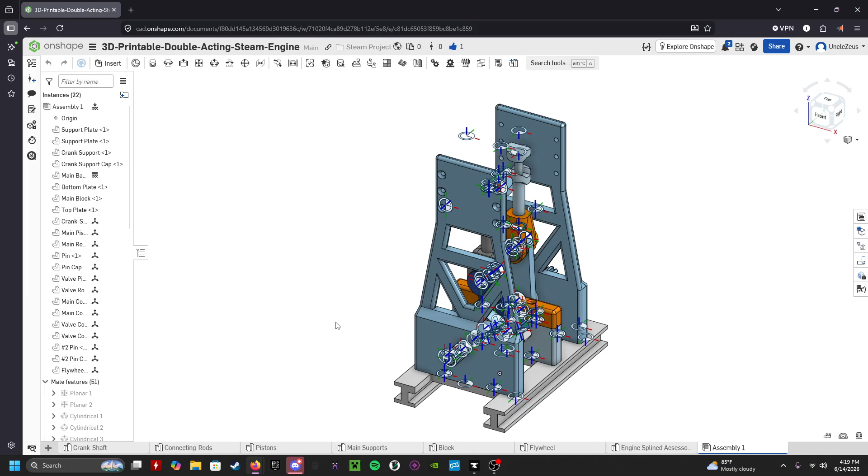It's a bit of a mess here, but this is what it looks like on the inside anyway. For some reason, every time I try and hide all of these mates, these connectors just show up. I have not figured out how to get rid of them yet, and it's really annoying, but we'll deal. But this is the engine.

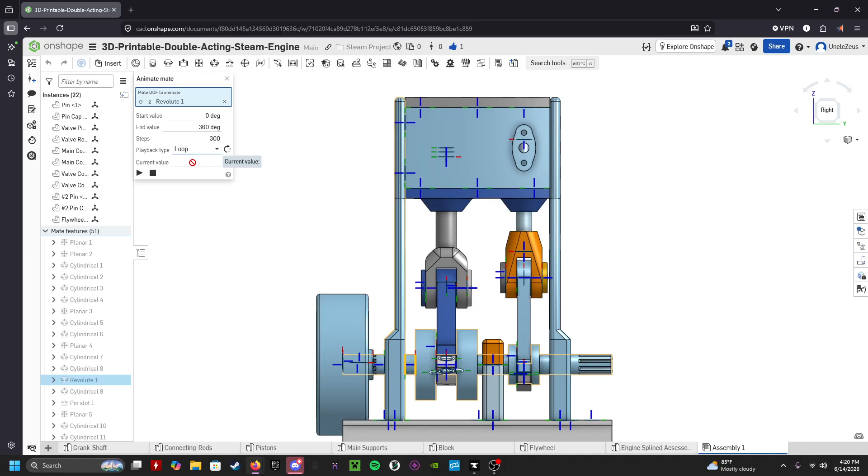Let me go find my Revolute joint here. Animate. Set this to loop. Okay. Set this to transparent so we can see what's inside. So this engine is operating backwards at the moment. Oh, no, it's not. It's spinning counterclockwise. That's right. So it is spinning the right way.

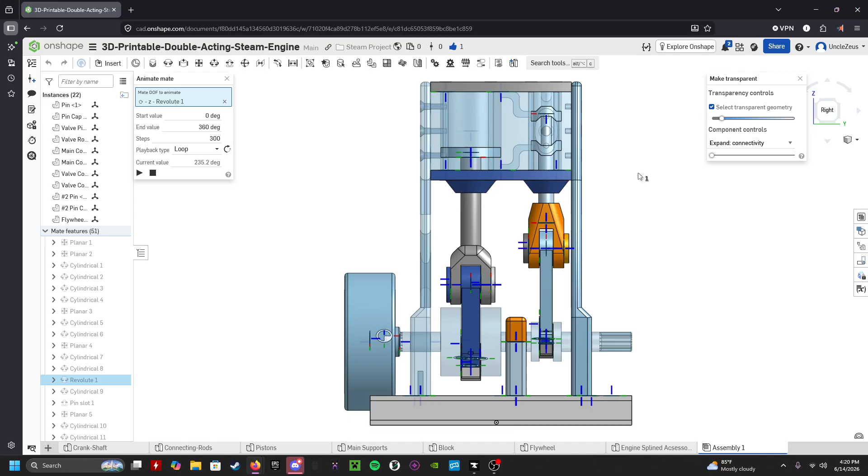So as you can see here, as this slider moves, pressure comes in from the middle, pushes the top down, exhaust, pushes from the bottom, and it just repeats. This side is the intake. As you can see here, it feeds into this small tube that goes inside the valve body. The exhaust is a little bit more complicated. It feeds from the top and the bottom into this tube on the output.

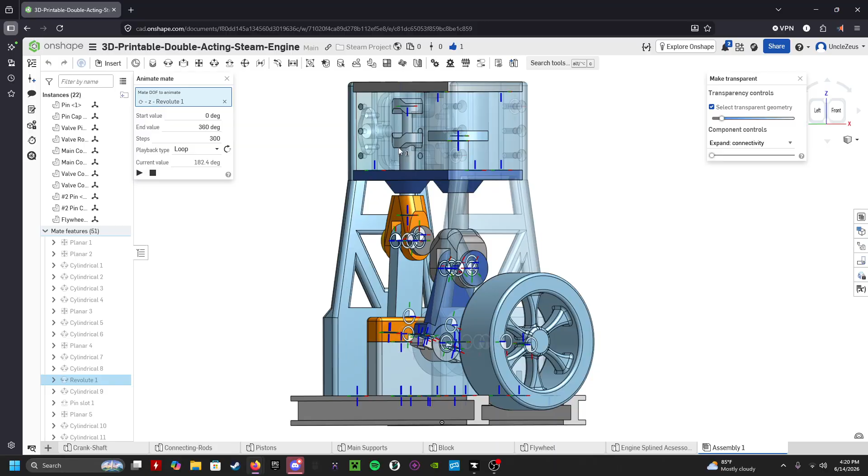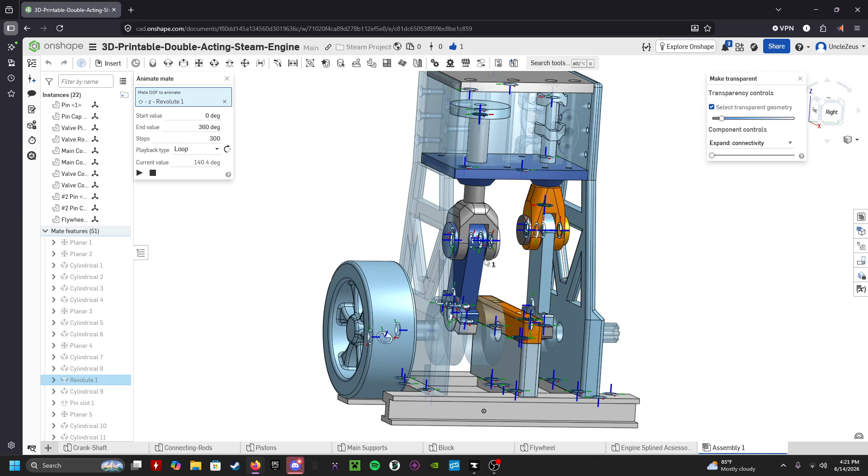And then, as you can see, there are these transfer ports that go to the top and bottom of the main piston. I guess this is the advantage of using a 3D printed part, is I can make these internal channels pretty easily without too many problems. I don't remember the exact length of all the parts off the top of my head anyway. I can go look at my spreadsheet, but that's whatever.

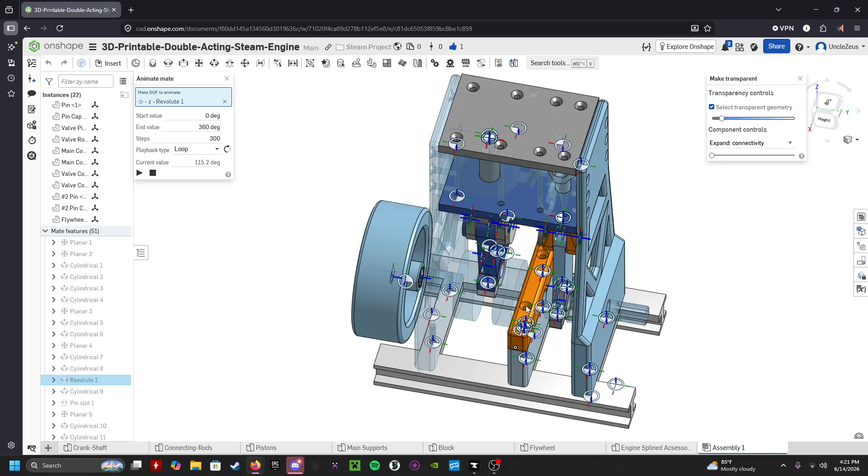You may notice that in the testing, this cap here was not put on. It's because when I was designing this, I didn't really think to consider how it was put together too much. And these screws just simply don't fit. I can't get the Allen key to get to them, not easily anyway. And it was causing too much friction anyway with the crank because it wasn't worn down properly and it was a mess. So on the real one, it just isn't there, but it was supposed to be there to help keep the crank in place.

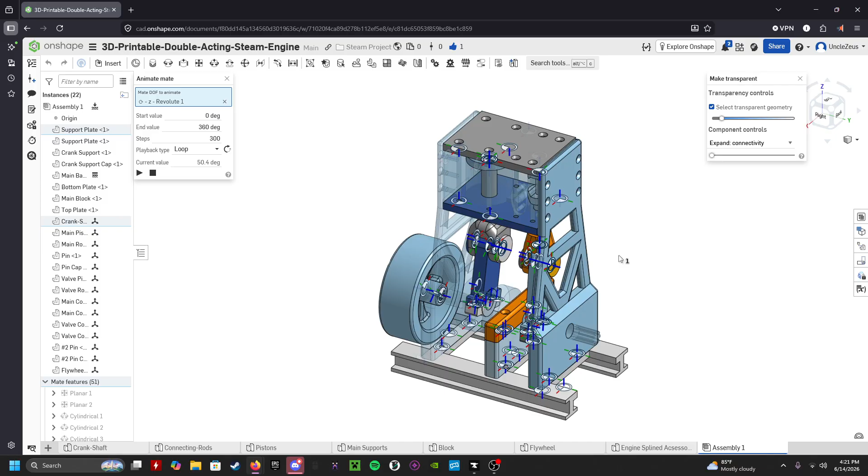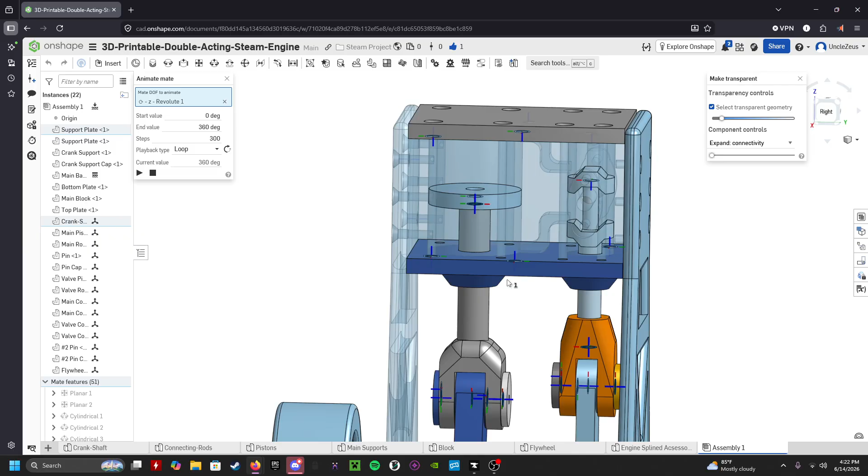As for other designs, we have this top and bottom plate for the main block here. The bottom plate has these two cone shaped pieces here and will help keep better sealing against the surfaces here. I wanted them to be separate so that they can bolt on with O-rings on the inside, but I just didn't get around to doing that. I plan on making a Mark II of this pretty soon in order to improve a lot of things, because as you may notice, there's no O-rings, gaskets, or seals. It's just running as it is.

And there's a lot of friction due to the parts because I made them pretty tight tolerance, and 3D printers aren't known for their, you know, manufacturing detail. So one of these days, I either want to get an SLA printer or just redesign this and make the parts have better clearances and just use bushings, which would probably be the best for everything.

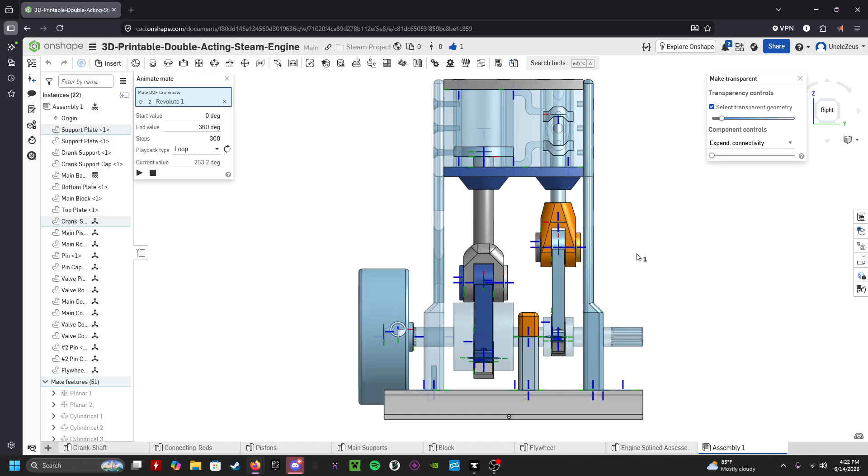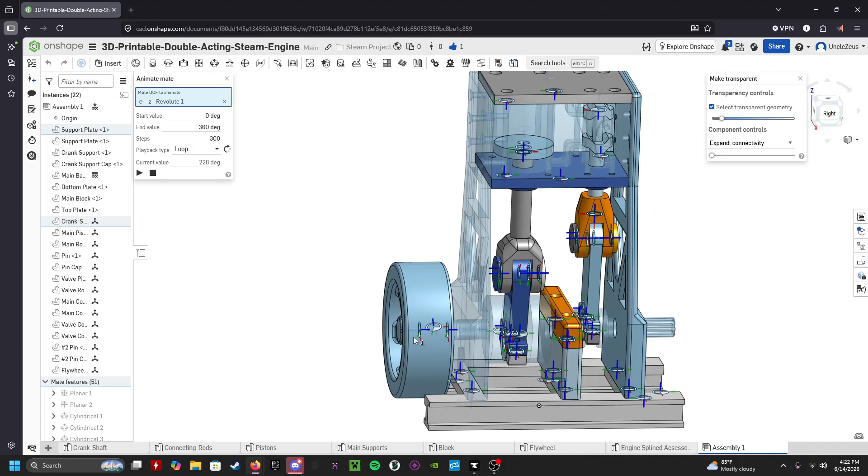It has a, I believe this is a 12 point, no, this is an 8 point spline on the output, which is connected to the flywheel right here. I actually printed two of these. The first one I made the splines a little too small and it was really hard to fit on, but the second one fits better. It is a little warped though, if you notice in the engine running video, it wobbles a little bit. None of this is balanced. It's kind of just chucked together. It's kind of a miracle it runs.

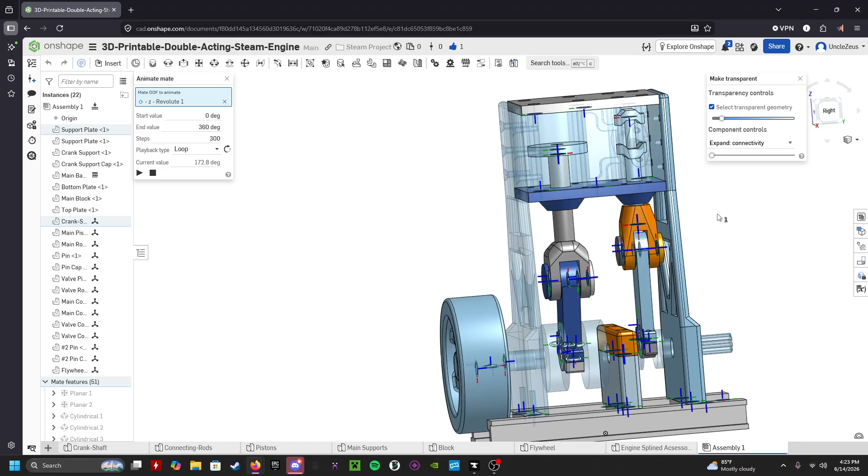Each one of these frames is bolted from the bottom using 6 M3 screws that are countersunk. All of the screws in this build are M3 by something countersunk, except for these two bolts here, which were meant to be socket cap, but they don't fit properly, as you can clearly tell. So, don't think too much about it.

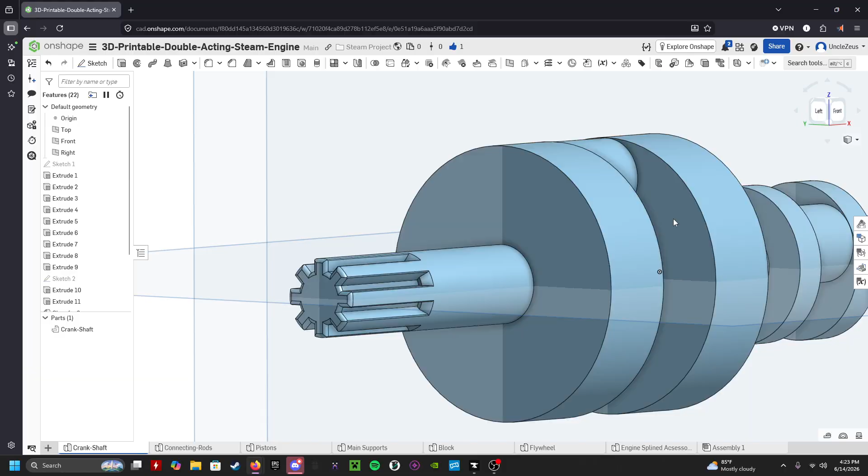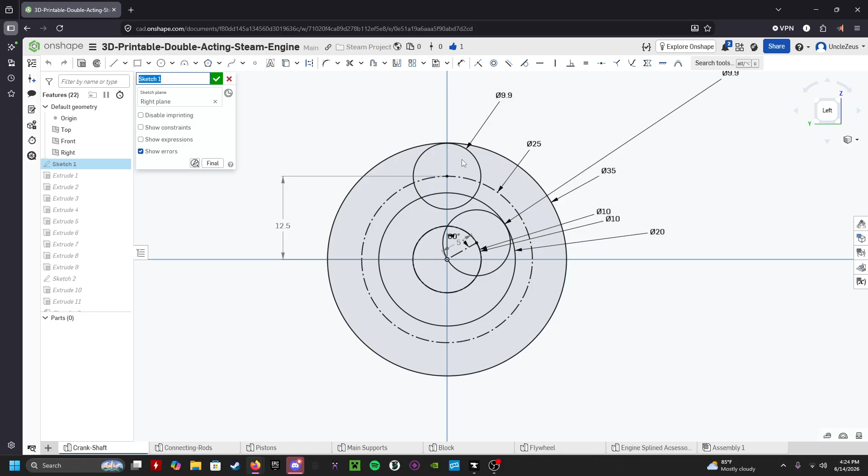Going into the more design aspects of it, this is the crank model here. It's a basic model. The valve has a 30-degree offset, I believe. Let's double check here. I believe it's 60 degrees. Well, I was wrong. But basically, since it spins counterclockwise, the valve follows just behind the piston in its stroke.

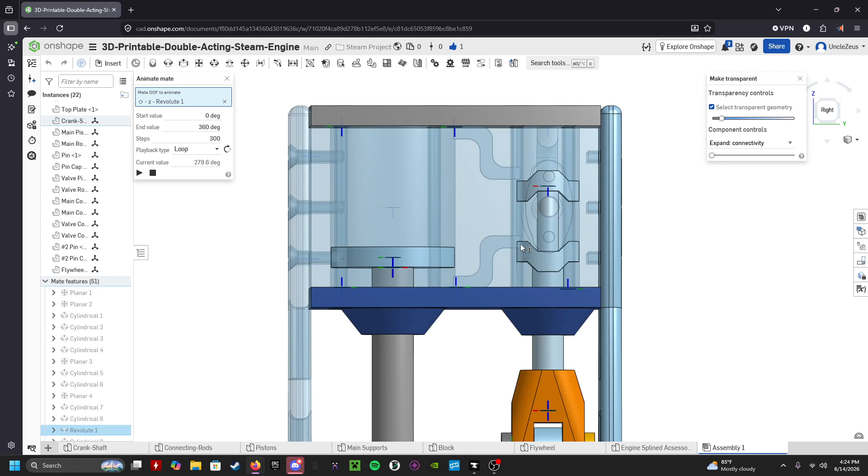So that way, whenever you're running it, the valve, as we come over here to my loop again, animate, play, loop, play again. There we go. Make this transparent again. You can see the valve body ever so slightly trails behind the main piston. This is so that way the timing can be maintained. It's a little aggressive here because I don't have a lot of space to work in here, and I kind of just made the stroke too small.

So as you can tell, there's a moment here where it's just compressing the air in the cylinder with the momentum instead of getting pressure. So right now, it's pressure. Normally this would be fine with a normal steam engine because the piston has quite a lot of weight. And normally you'd have 3 or 4 of these in a line, and it would help keep pressure in the system because no one piston would be in a dead spot. But since this is a single cylinder engine, it can cause it to stall quite easily.

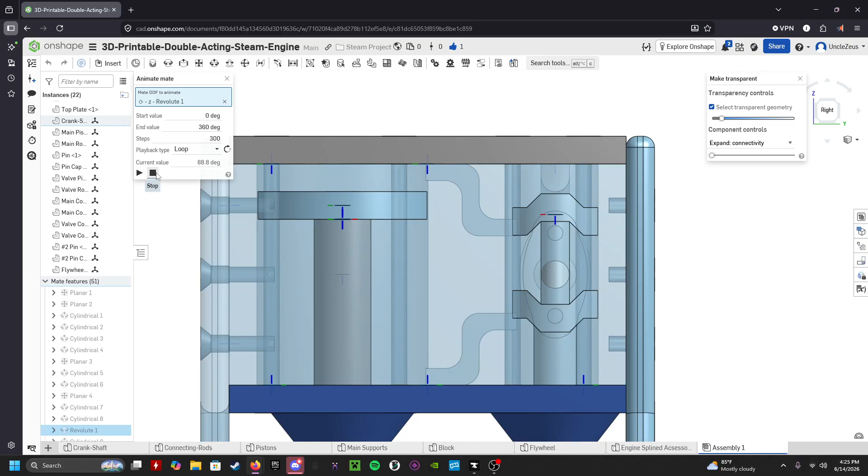Normally the advantage with steam engines is, especially with good seals, if it gets stuck like this right here, so if I pause, stop. So if I pause, pressure will keep building inside this chamber here and keep getting dumped into the top piston. And eventually either it stalls out completely, it goes to the max boiler pressure and it just stays there, or it builds enough pressure that it starts to push the cylinder back down, which basically means that they're constant torque devices, which is why they were used for so long in trains. They're incredibly powerful. Main disadvantage is just brute efficiency, especially with reciprocating engines, although that has been improved with technology.

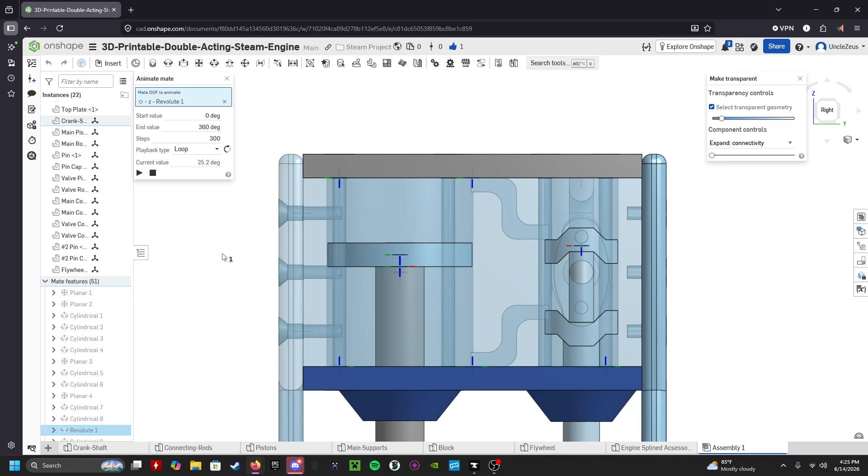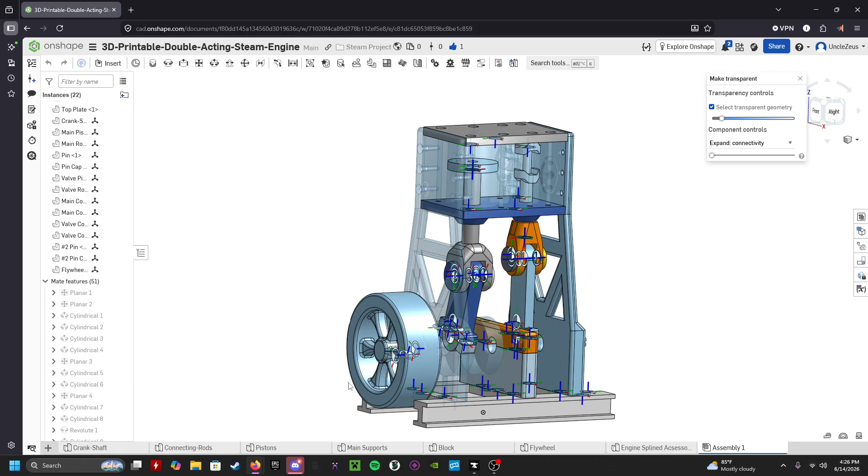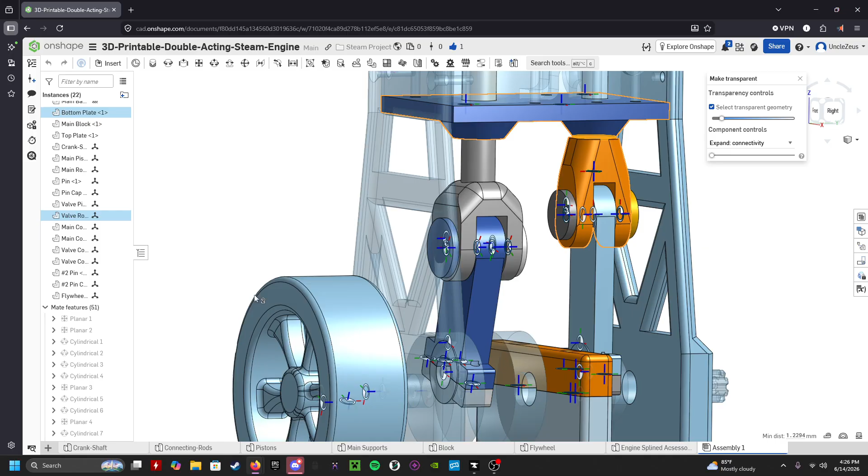Other notes about this design. This gets really close to this surface here. I don't know if you can see how small that gap is. Let's move out of that. Move this to top of the valve stroke. It's not a lot of space. Yeah. So there's some clearance issues. These actually fit really well.

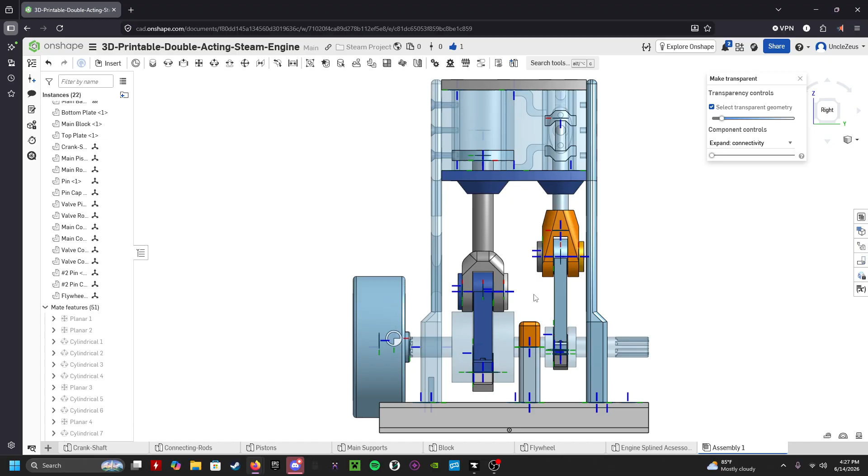The issue is on the main cylinder here, as you may notice when it's coming down, it briefly contacts the crank. Here, let's spin this the right way. So right here, there is literally no space. I don't know why I did that. It would have been easy to just cut a little bit off either one, possibly even the crank here because it's so massively oversized, but it is what it is. So that's one reason why it causes a rubbing sound every time it hits here, because it's touching.

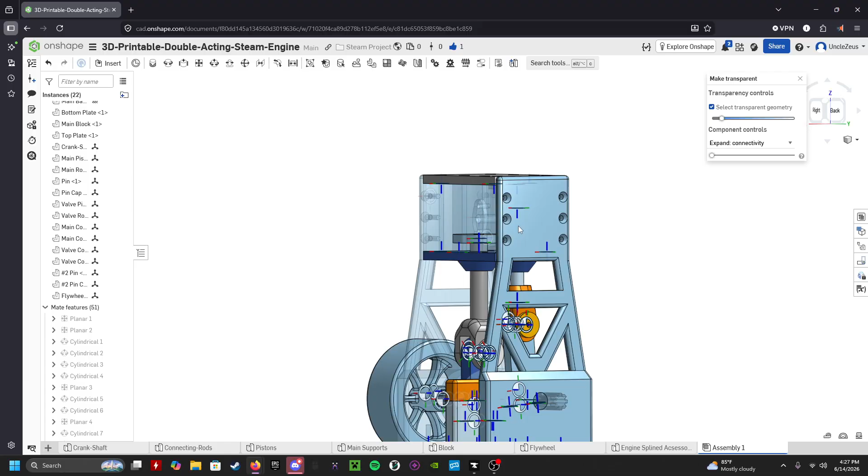Each of these plates is solid. The block itself is mostly solid in order to keep pressure. There is a minimum of 3 millimeters of solid plastic between the inside wall and the outer wall here. That is to keep pressure. I don't remember the specific math. I could go look at it right now, but I don't care to. But it's because of that wall thickness that it can handle such pressure, even though it's made out of plastic. Because plastic is surprisingly strong if you have enough of it.

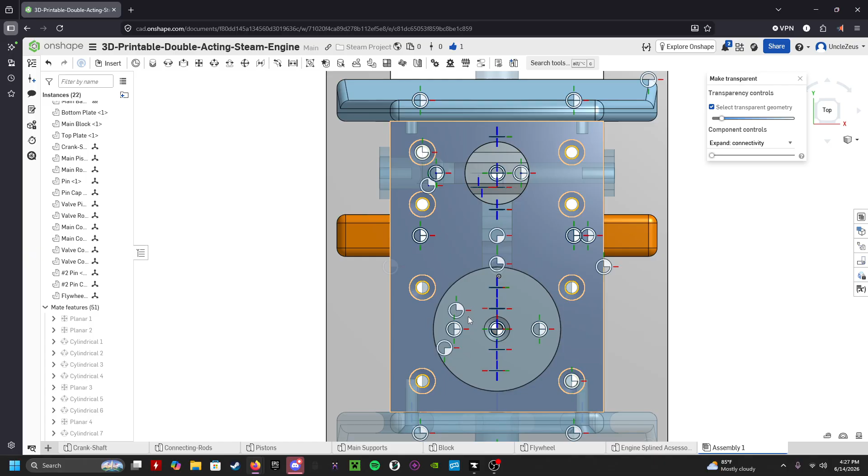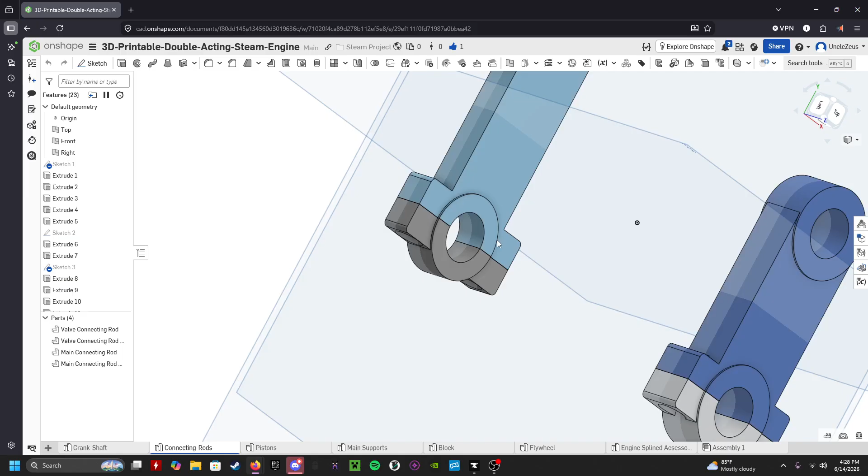The goal for one of the future designs here is to get this machined out of metal. Clearly not with this design. This design was heavily modified so it would work well with plastic, but I'm sure it can be redesigned fairly easily. These are the connecting rods. You may notice these lips here. This helps to minimize the contact patch of the entire rod. It also helps just maintain the bearing surfaces.

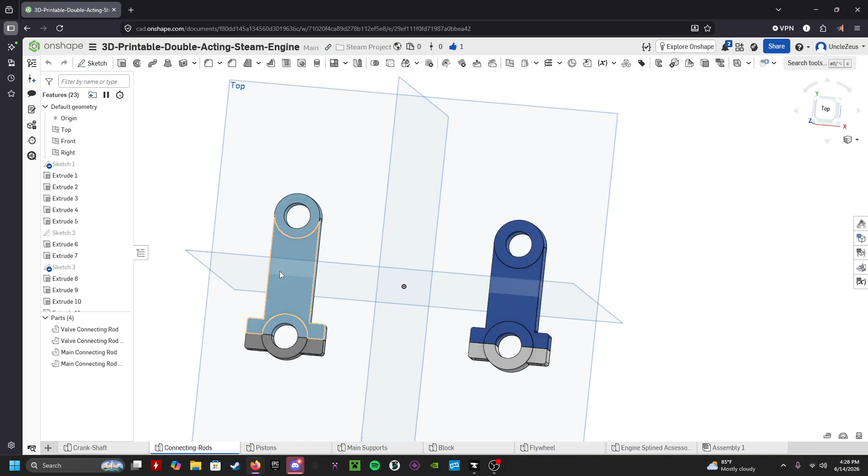You can tell that the valve one is longer and thinner, and then the crank is much thicker and more stout. That's because this is under a lot more force. This one could be way thinner here. I could have cut off a lot of material to make it lighter, but I didn't care to. I just wanted it to work. I will refine the design later.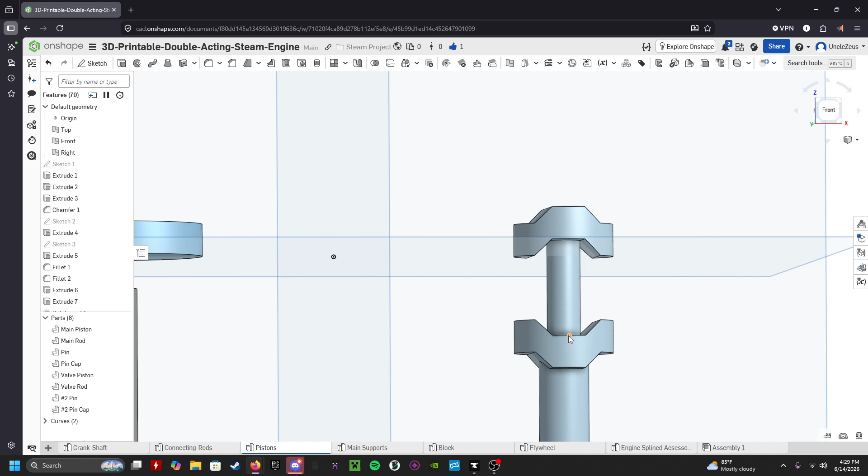So it would cause issues. What I did here is that there are notches cut out on each side to maintain the pressure difference and the sealing surface, but also because the hole for the exhaust literally goes right here to the very edge, and the hole for the intake goes right here to the edge. They are not very far apart. The transfer ports on the inside are just barely within these two surfaces when it's in the middle. It's really weird and kind of dumb, but it does work, so I guess it's not that dumb.

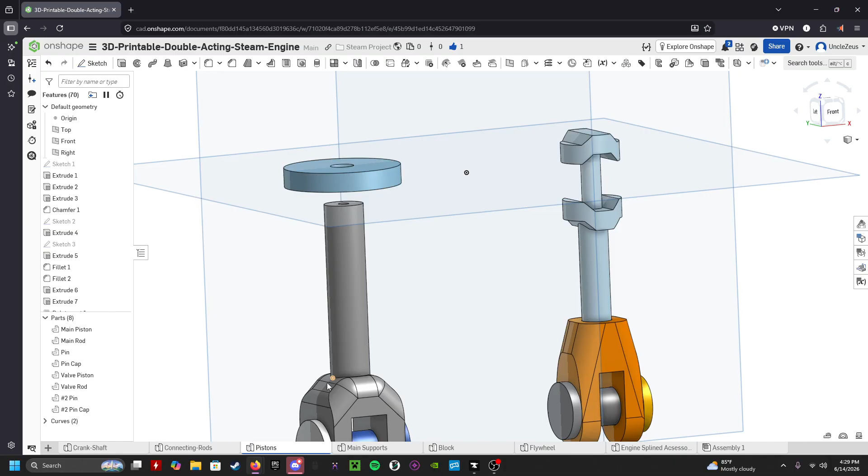The reason why this one isn't as rounded as this one is because this is one solid piece. This one's two separate pieces. If I go hide the pin and the pin cap, you can see where it screws in. This does make it horribly difficult for alignment, although it can be out of phase by about 2 degrees, I think, and still be okay.

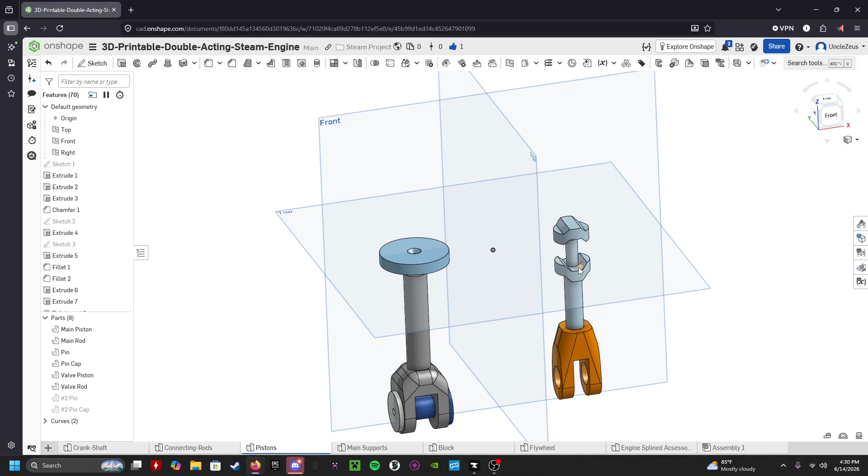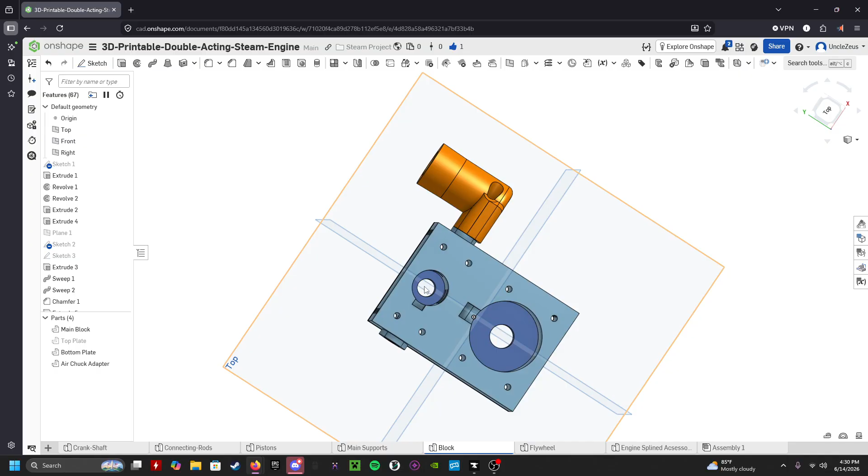It's just, I did that because in order to install it into the block, if we come over here, you have to install it with the bottom screwed in because it has to come through here. So for the valve, because of its weird shape, I couldn't make the plate separate like I did with the main piston. So you have to insert it from the top, unlike the main piston here, where you insert it from the bottom and then screw the top on.

That was the wrong thing. So yeah,

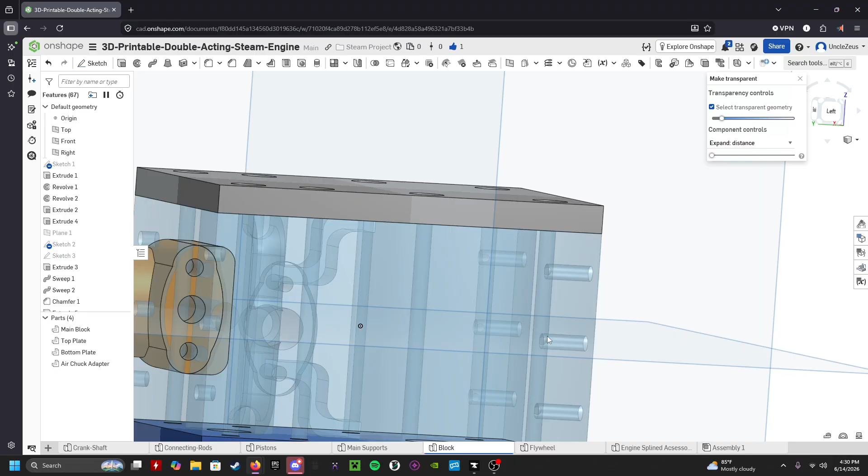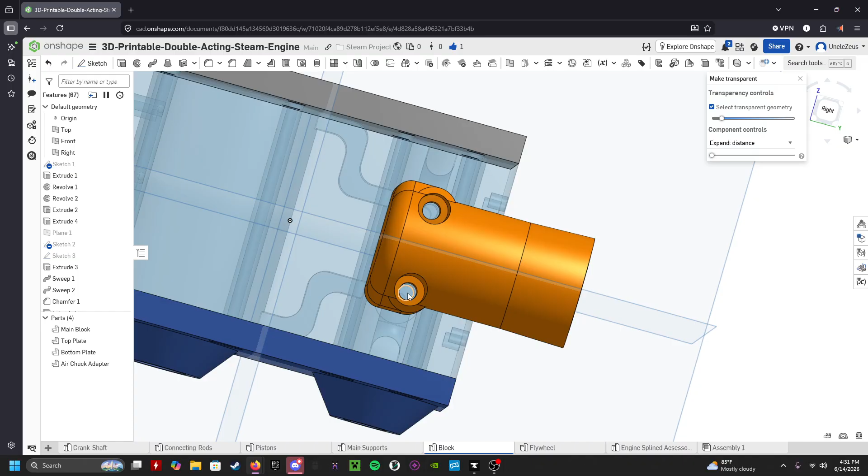But this is the block here. We already looked a little bit at it earlier. You can see all of the fancy ports. These are the holes for the top and bottom threading. It's the side for the mounts, and the flanges here. Here is the mating surface for the pressure adapter I made. This fits a 1/2 inch NPT fitting, or airline fitting, I should say. And then it bolts on with two M3 socket cap bolts into the flange here.

I currently don't have a gasket, but you should use silicone rubber if you actually decide to build this yourself, if you want to for some reason. I don't know why you would. This thing kind of sucks. I need to do some more work on it.

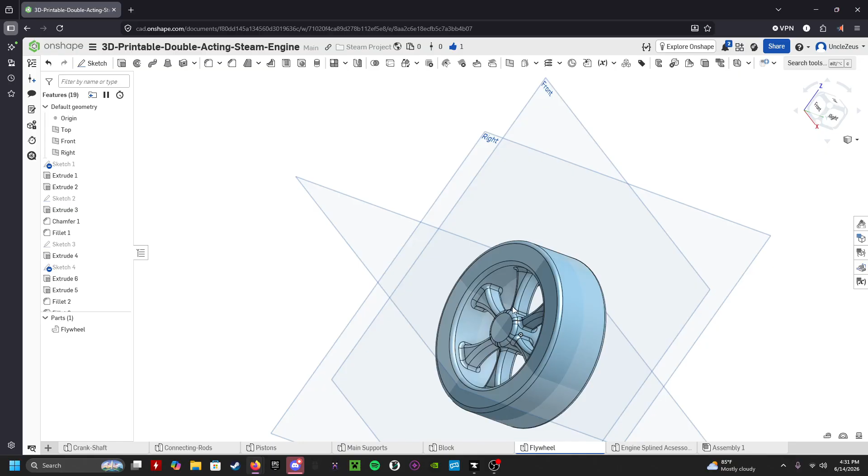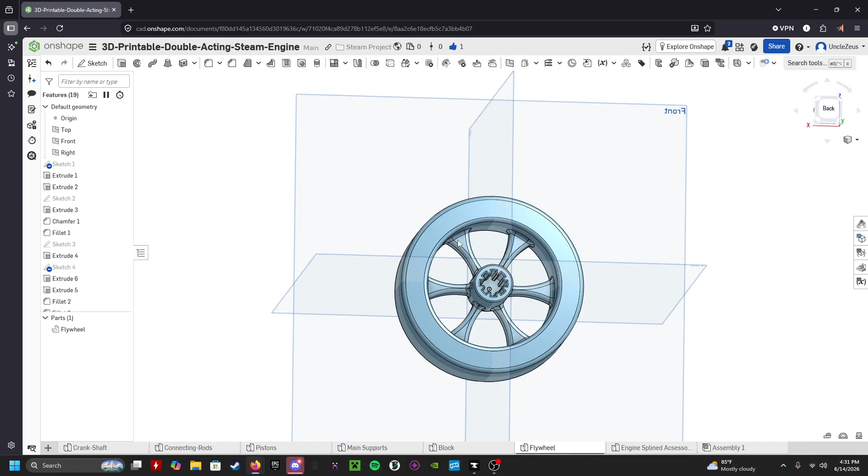This is the flywheel. I don't know why I got so fancy with designing it. It weighs 67 grams, which is just about enough to keep the engine running. It would be more than enough due to its light mass and moment of inertia, if it wasn't for the fact that the friction coefficient of the entire engine is really high, even with grease, sanding, and a lot of work. So this is just barely enough. I should have made it significantly heavier, but I'm limited by plastic, so I don't know what they want from me.

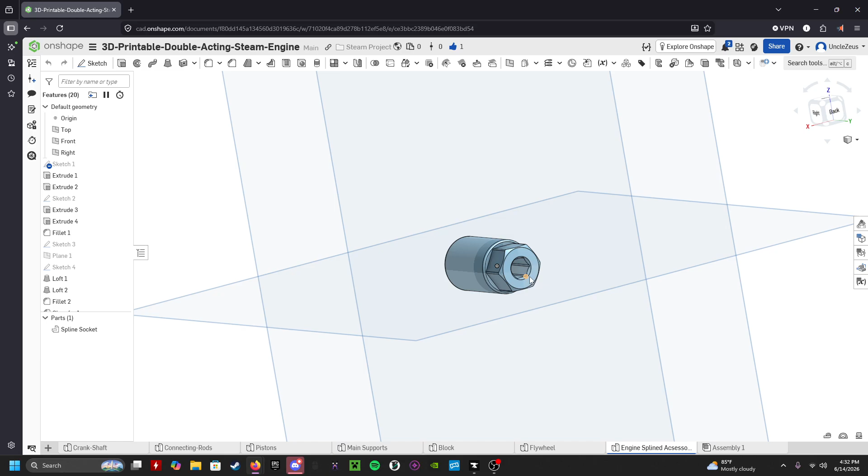This whole thing is hilariously stupid. So this is a splined socket I made, so that way I can attach either a drill, an Allen key, or a wrench to the splines on the crankshaft in order to turn the engine over.

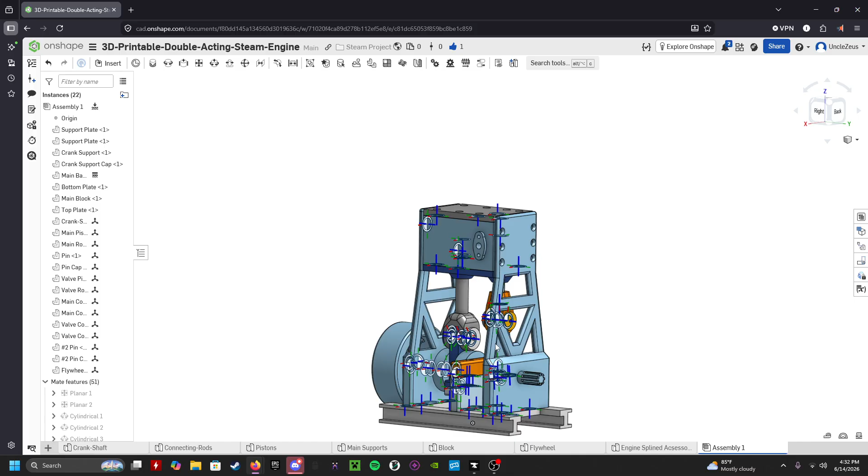I don't have any videos of me doing this, but I basically threw it onto a Milwaukee Gen 2 drill set, with the gearbox set to max speed, and just sent it for like several hours to get all the parts to interference fit with each other. It took forever, but it does run fairly smooth now. When I initially put it together, it would barely turn over even with a wrench, but now it actually turns pretty well. So it worked.

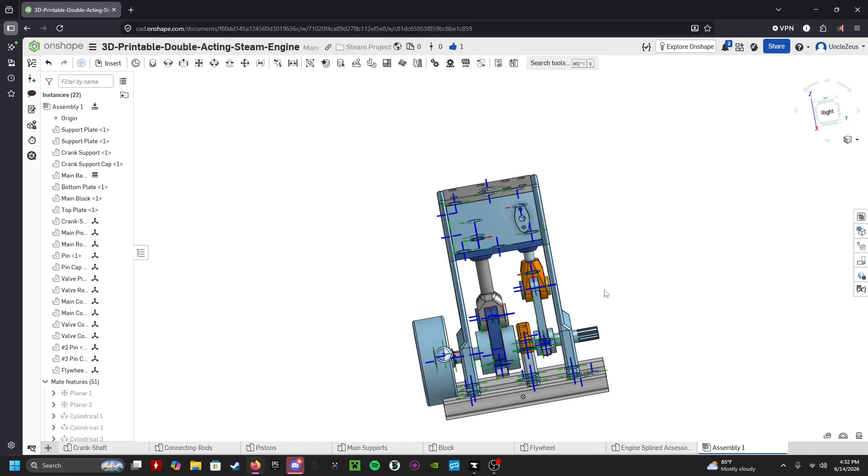Oh yeah, and about that high friction, that was after I sanded all the parts. Yeah, this thing kind of just sucked, just generally. I'll hopefully improve on version 2.

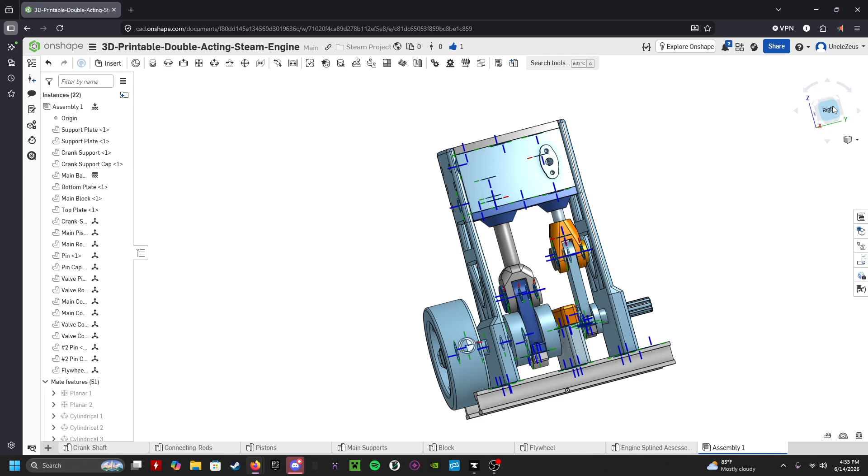If you're wondering why the design looks like this, it's because I was modeling off of, I won't grab that image because it's probably copyrighted, but I was modeling off of the engines, especially in the Titanic and other ships like the Britannic, where it's these tall engines. Now, clearly it doesn't look the same because I can't make the part super thin or correct for its scale because this is plastic. I'm limited by my mechanical properties here. It's also the reason why these edges are thick, to help support the crank because plastic just sucks in general. But yeah, that's the steam engine.